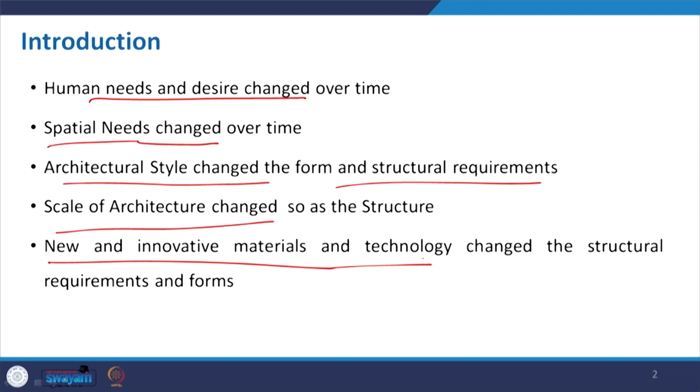And most importantly, the new and innovative materials and technologies changed everything, the scenario. From time to time we got some good material having good strength, which can be easily placed instead of using the traditional brick or other types of building materials, really giving more strength, as well as creating the desirable interior space that we normally look for, to maximize it.

So, let us move to the history, and definitely with the time constraint and other things, it is not possible to give all the examples, but here I try to summarize it or take some very prominent examples. So, I would also request that you also do this search and compile some more buildings in each of the phases, which depict the architectural style as well as the structure used in it. So, let us move on.

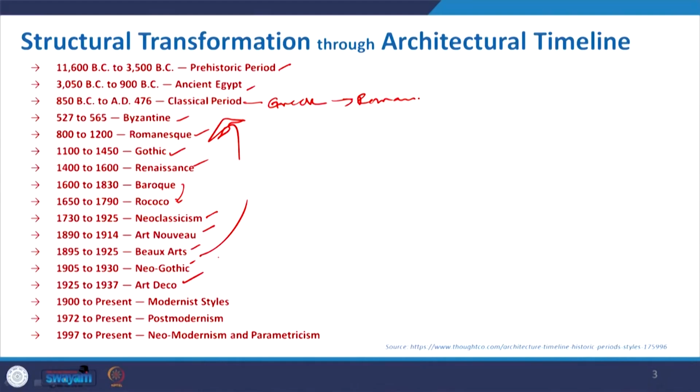And then we take the art deco and the Bauhaus movement during the 1920s, and in that particular phase the system changed; modernism started at that time. So in modern style, we go for minimalistic structure. Those are actually possible with the invention of steel and other things. So after the industrial revolution, the structural requirements and their use in buildings changed the scenario.

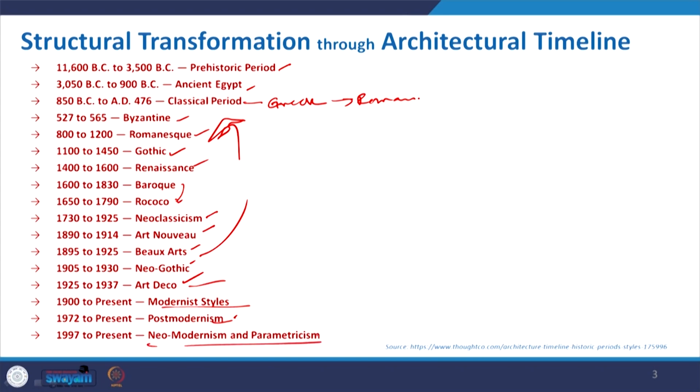Then postmodernism; we have seen some beautiful buildings at that time, including the Sydney Opera House and those kinds of structures. And then neo-modernism and parametric architecture, which are in practice nowadays, and you can see that all these, from modern to postmodern and parametric architecture, are in practice. Even in some buildings, we again look back to the earlier classical order in architecture.

But these are the architectural forms. So our focus will not only be to discuss contemporary architecture and its transition. We will also try to focus on the structural changes, how they have changed.

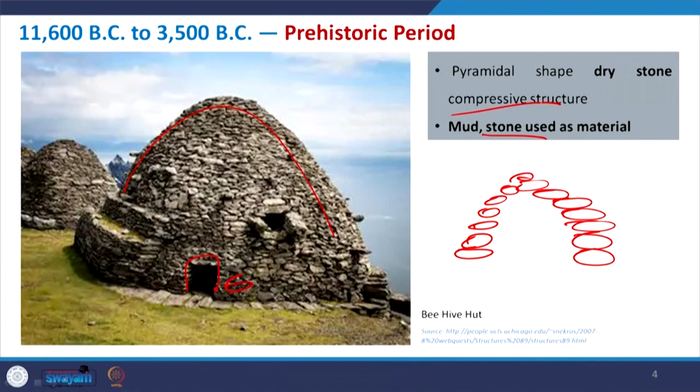And here sometimes we also used mud, but in most cases stone was used. So it had a small opening to just act as a door. So this is something really interesting at that time, and this is basically a compressive domical structure, where we just stack stone one after another to form it.

This is another example of dolmen. So this is basically the megalithic structure. A megalithic structure is basically where a horizontal slab is resting on the upstanding slab. So if you take a particular stone slab and make it upright in this position, and you put another one, again no mortar being used. So you can see how it is resting there. It is giving some form of stability, and because of the self weight and the position, it is making this structure stable.

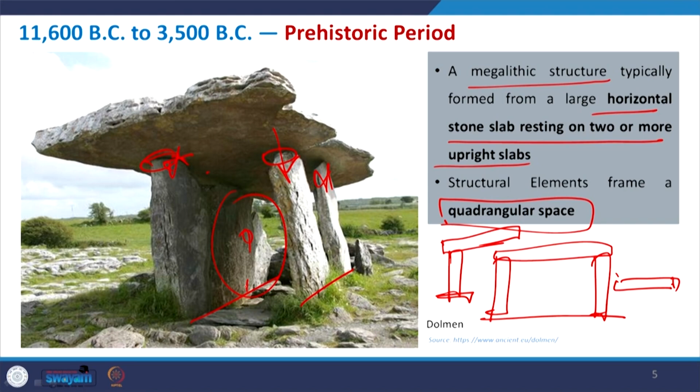So it is the horizontal stone slab resting on two or more upright slabs. So this is a megalithic structure, and it creates a quadrangular shape. So basically this is the interior space. It was helpful at that time to protect ourselves from the external externalities, or protect from other animals.

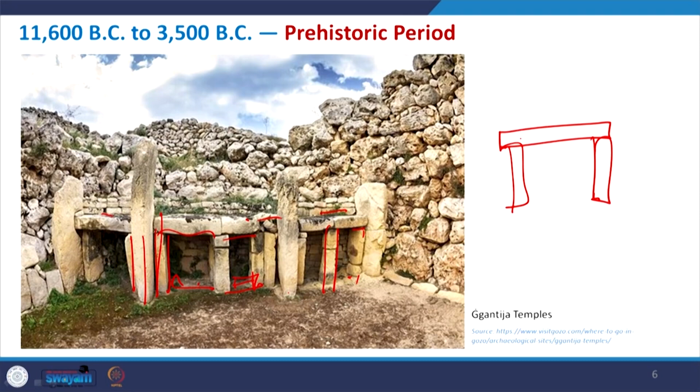So that was the idea, and from here itself the idea came of giving stability to a structure where the horizontal member will be resting on the vertical member, and later on we name it post lintel or post beam structure, that we will see in the next phase.

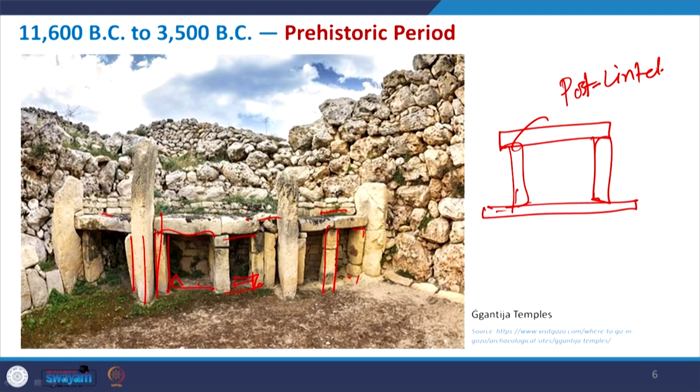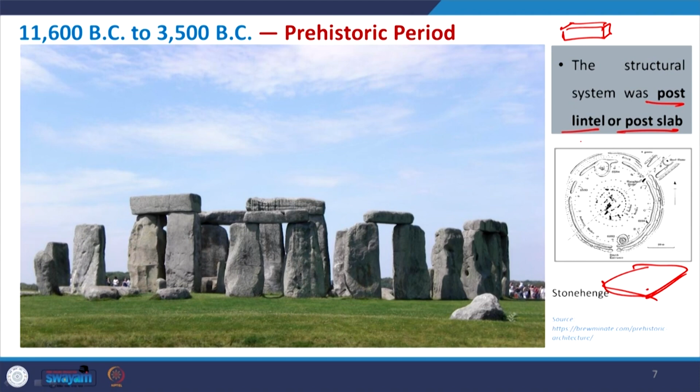So this is again a prehistoric example, and this is Stonehenge, following the same kind of arrangement of structure, post lintel or post slab. So depending on the span or the area of the stone we used, we call it slab when it has a considerable area, length and width, and when it is just like a piece of beam, then we go for this post lintel structure. So this is again one example from the prehistoric period, and now we move on to Egypt.

In Egypt again they created beautiful architecture with symmetry and stability. The pyramid is considered to be one of the most stable structures because of its larger base, and as it goes up it merges to a point. So for the wind condition and other lateral forces, this kind of shape is very useful. That is why now also in modern high rise buildings, as we go up we give a conical or pyramidal shape at the top in order to resist the lateral wind load.

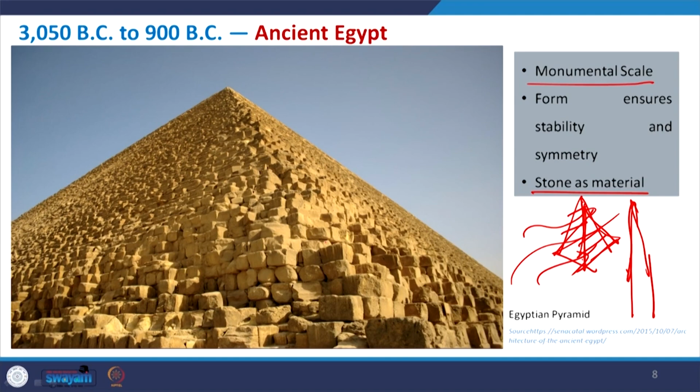But again it is a monumental scale. So structure is being used with stone as material. Using stone as a material gives good strength, and altogether, one after another, it will also give a megalithic structure, so that it was stable.

Not only pyramids, in that period in Egypt they also constructed other structures where they used the timber beam, and then this is monolithic stone masonry. So you can see this particular wall; a piece of stone they have used there. Then the columns made by single rock. So that is another important issue.

From the single rock they cut and they give some kind of ornamentation to it, they paint those structures. In Egypt they are famous for Egyptian painting on the wall and the columns. And overall the concept remains the same in this era also. This is post lintel or post slab, where your horizontal slab is resting on the vertical columns.

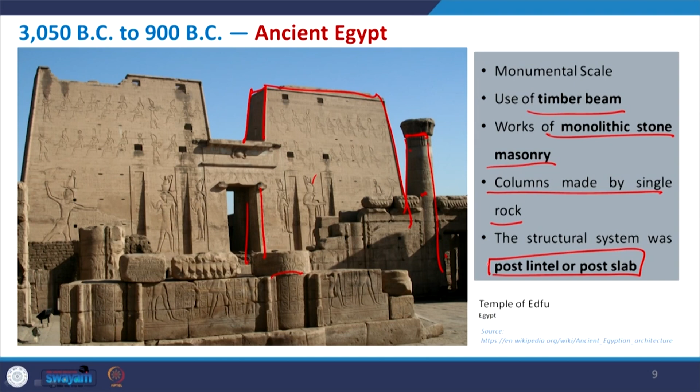Now, coming to the classical period, we start with Greek architecture, and this is the example Parthenon, which in many cases we repeat because of its multiple characteristics. As we already discussed about the Parthenon, there is basically a structural dictation to create this form. In a rectangular form multiple columns are placed and then connected with a lintel or beam, and what it gives is the trabeated system where you have this horizontal beam on the column, and then you can create these triangular members to support it to create the roof system.

And the most important thing here, it is not a simple post beam structure or very rough finish. Enough decoration has been made, and the Doric architectural style has been used in this structure. So you can see the capital of these columns, and we already discussed in the last lecture how this ornamentation was done in this particular period. Even in the lintel or beam, ornamentation has been done.

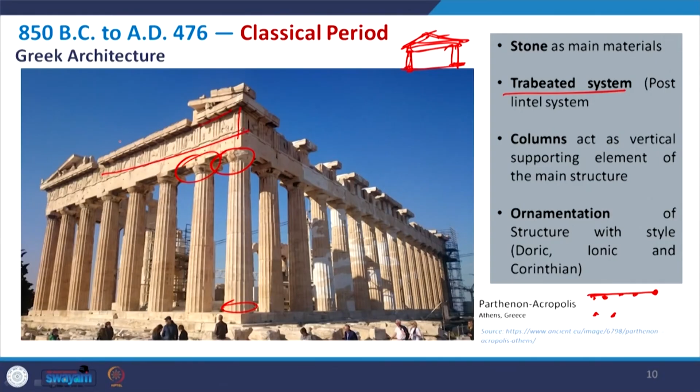So the basic idea is your post lintel structure, but with some ornamentation, and this has been carried forward to Roman architecture, where the structural system is again post slab or post lintel, but in this case the columns are arranged in circular or rectangular form.

And here in the entrance portion they have used columns, but here the Corinthian style is used, where the capital gives ornamentation aligned with organic things like leaves and other living elements. This structure is pretty similar to the Parthenon at the front portion, and the back portion is a huge dome. So, this again falls under the category where stone is used as a material.

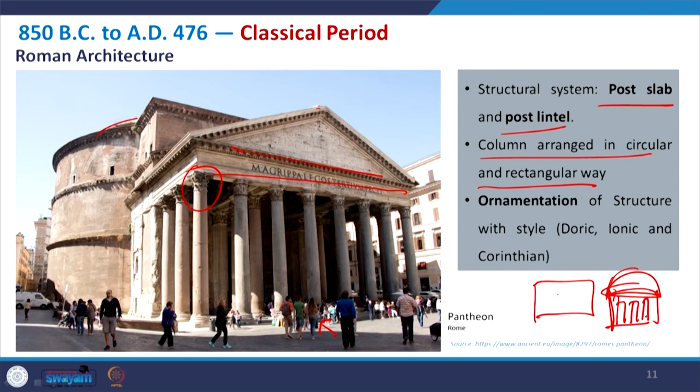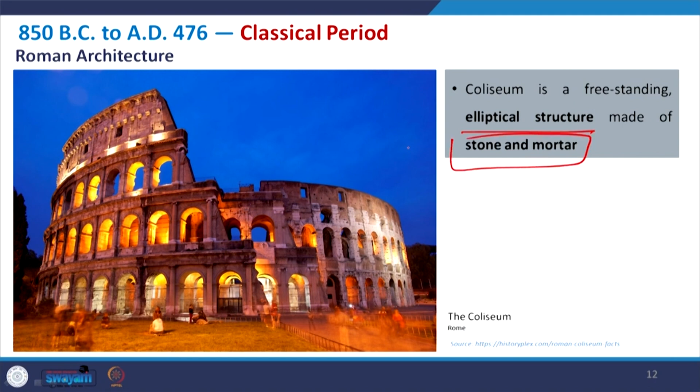Now, this is another example from Roman architecture, the Colosseum. Here this beautiful arena is made with an elliptical structure, and stone and mortar are used in this case also.

Now, come to the Byzantine, where stone is replaced with brick, and then the dome roof, like we have seen even in the Pantheon in Rome. Along with that you can see the use of arches for the windows, and even for the structure of this huge roof. So, again the pitch roof has come into the picture, and the construction material is basically limestone and sand mortar, and the construction system is wall slab. Instead of columns, it is basically a load bearing structure.

So, the wall is formed, which gives the envelope, and on top of it is either a pitch roof or a dome roof. So, there is a transformation that we can see. Earlier it was a post lintel kind of structure, where you get more void through the structural arrangement itself, but here we go for wall and slab.

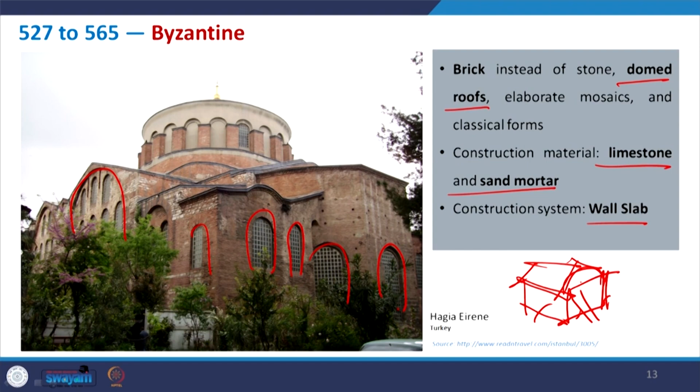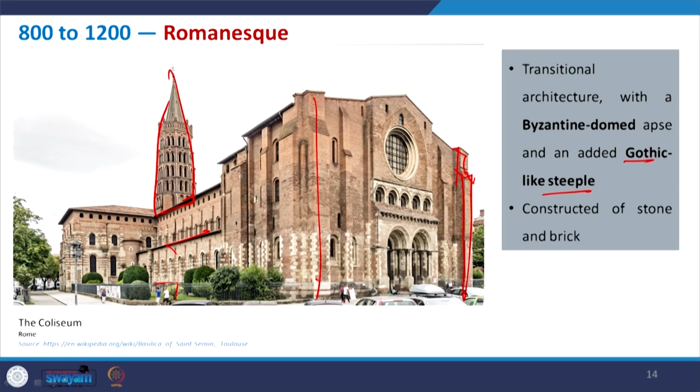Now, the Romanesque is again the addition to the Byzantine dome, that is the Gothic-like steeple. This structure is added to it, and if you see, the scale has changed a little, it has reduced here, and along with that they also create some additional support. So, basically here stone and brick are used, and again it is a load bearing structure that was constructed during this phase.

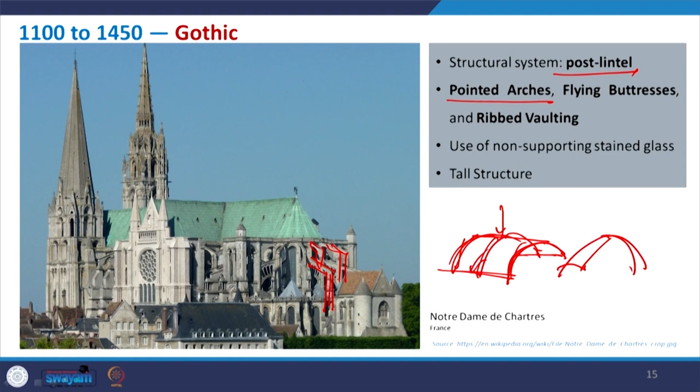And when talking about the vault, sometimes it may be a compressive structure which transfers the load through the structure onto its support, and sometimes it may be the ribbed one, where we create a frame of the vault and then cover it up.

From the interior you can see all these buildings. This is the Notre Dame in France, where we can see the pitch roof along with the buttress, and inside you get some cylindrical form and the use of vaults. So, gradually, in order to support the tall structure and also create more interior space, to make the space column free, to have the assembly in a beautiful way.

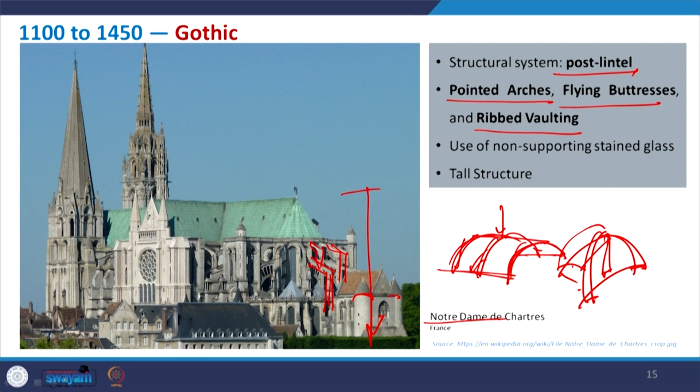So, development of this kind of compressive structure, where the ribbed vault is used and lateral resistance is provided by the flying buttress. These are some of the additions. So, shifting from simple post lintel to adding all this is one of the features of this period.

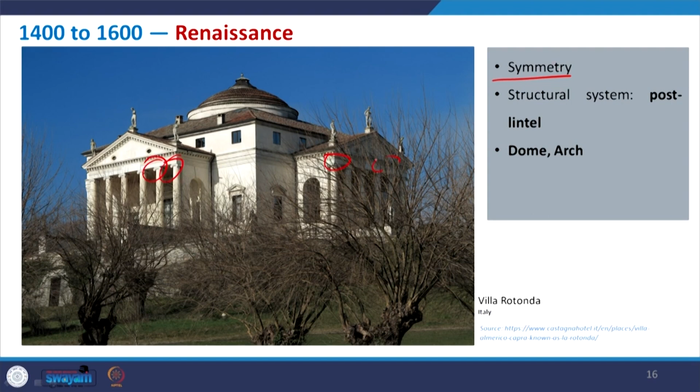Come to the Renaissance period. Here symmetry played a role, and you can see ionic columns being used, similar to the Roman, but again it is post lintel and post slab structure. Along with that, the central dome and arches are used. As we discussed with the properties of the arch, with this symmetrical arrangement it will easily transfer the load to the support. So, we can create some span with this kind of structure.

The same is true with the dome. And if you take an example from India, then the Gol Gumbaz in Bijapur also has a huge dome. So, that is practiced to create this structure.

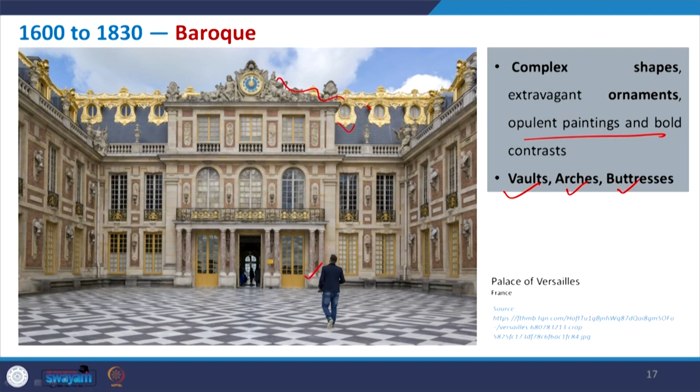Now, come to the Baroque architecture. Here basically the structural arrangement has been followed through your Gothic and all, but more ornamentation and very complex shapes, the curvatures and others made for the decoration purpose, and again vault, arches and buttress as in your Gothic architecture they have used to support the building, but more importantly it is creating some contrast with the traditional architecture. So, ornamentation of structure, creating some false column, that was used here. So, that is in this period.

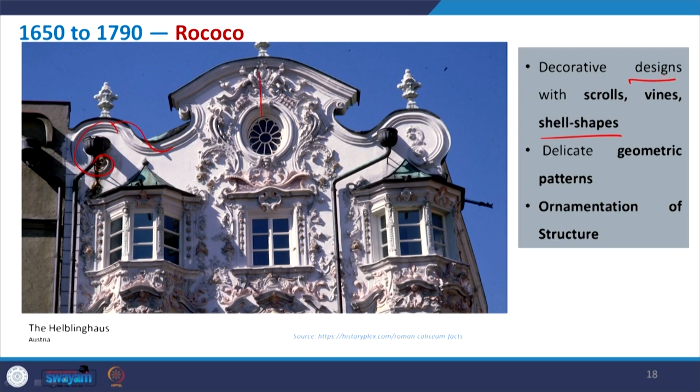Then Rococo is again further decorative design, and you can see those moldings. So, there also the delicate geometric patterns being followed, some involute and symmetry that has been made there, and basically in this case again the structure is being followed the same as the previous one, where you get this particular Baroque architecture or Renaissance architecture.

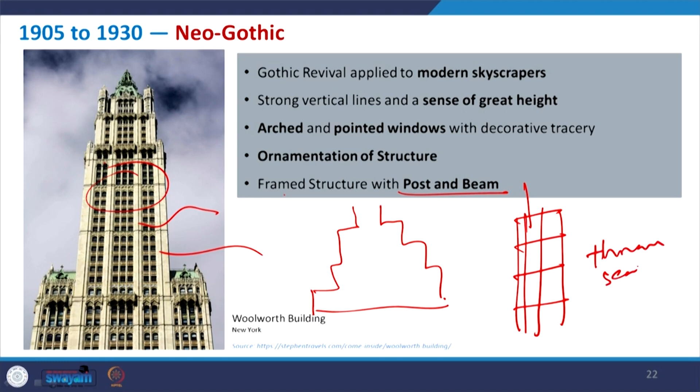Now, come to Neo Gothic, it is basically a transition to the modern skyscraper, but adding some features of the Gothic. So, Gothic again, it is a revival period where those kind of ornamentation is made, but now in this case we have this frame structure with post and beam. So, frame structure comes into point, and multiple floor high rise structures being made, but again due to that lateral pressure and all, it has this particular step cut architecture, where when you go up, the cross section of the building is reduced to resist the wind load. So, this is some advancement being made, where the scale has been reduced to the human scale. The space is optimized, but again ornamentation is still on in this particular period.

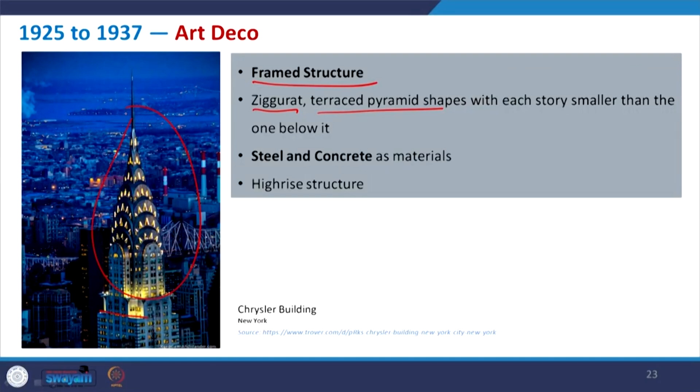Now, Art Deco movement, again the frame structure is already introduced. So, again ziggurat or terraced pyramid shape structure being made in this case, and steel and concrete used as a material to give the form, and again it is basically the high rise structure. That was the need to create some high rise office buildings or residential buildings, hotel buildings, and this is one example of that, where overall it is giving a nice aesthetic look, but from the structural point of view it has moved from a typical structure to the frame structure at this moment.

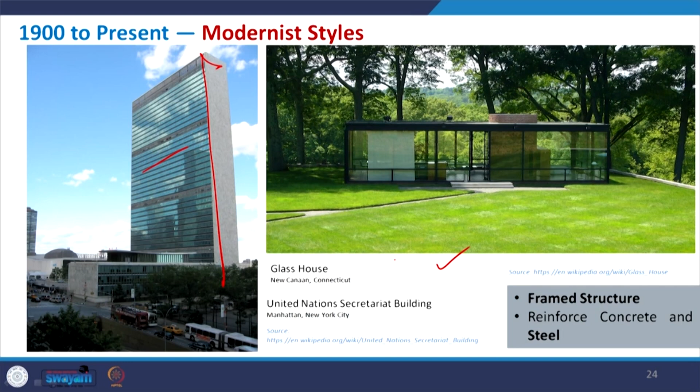Now, come to the modern style. So, here it is the time where architects and designers prefer the minimalistic form with the structural application. So, this is one example, the United Nations Secretariat buildings, very simple straightforward building, frame structure, use of steel and concrete is very predominant and very simplistic, no such decoration, and the same is true for the glass house. Again it is the use of steel and then use of glass. So, basically in the modern style decoration and ornamentation was not given prominence, rather the space creation and the use of the structure to reduce the thickness of the wall to carry the load being given importance. So, that is why since then we create multi-story buildings with this.

And in that case also, like in Sydney Opera House, it is being made on that category. Now, come to parametricism. This is the current age architecture, where it is not a perfect geometry. It is being played with some parametricism, and here you can see the nice wave and curvature being made, and it is only possible because of shell structures and other structural advancements and innovations of different materials, which can actually bring this into reality with minimal thickness and maintain the stability.

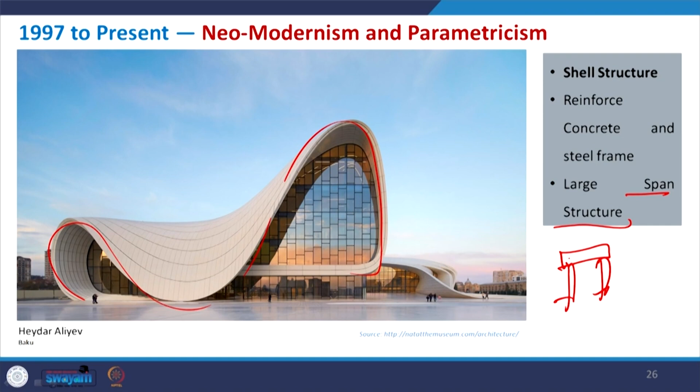So, large span structures are being made, and there are many examples. This is one of them. There are examples of different high rise buildings, many designed by Zaha Hadid. So, this is the overall transition from a simple post and beam or post and lintel structure to this kind of form. This is a long journey, and due to the invention of steel after the industrial revolution, this has become so popular. We have seen the Eiffel Tower at that time. So, that brought a change.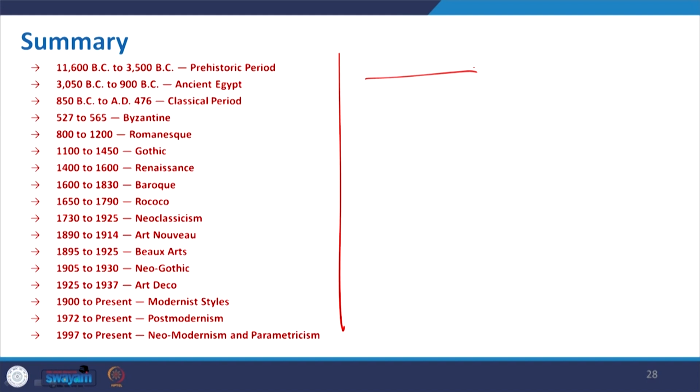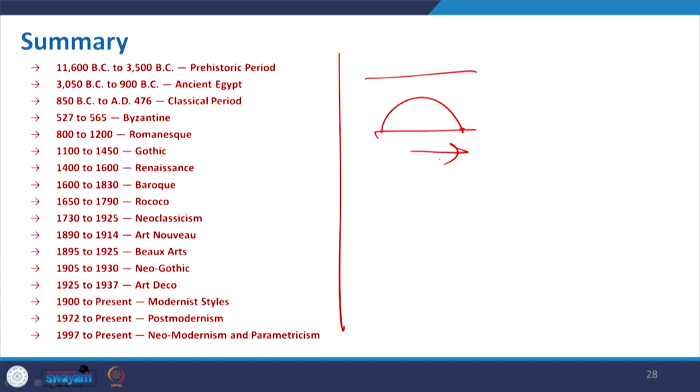During this phase, in the Indian context, we have seen the Indus Valley civilization, where there are also examples of some of these structures, like the Great Bath. Later on we move to Buddhist architecture, where we get the domical structure in Sanchi, and also rock cut architecture to create those stupas, and then we have seen the Dravidian temple in that era, where again the form of a mountain or a pyramidal form of the temple was made.

Then slowly we move to the other phase where we have seen Islamic architecture, like the Taj Mahal, which is a beautiful example of structure, symmetry and ornamentation. Even in Fatehpur Sikri, we have seen different uses of brackets and their ornamentation. Later, in the British or colonial era, we have seen the use of different columns, and they created some buildings following the old orders like Doric, Corinthian and all. And after independence we went for the global movement.

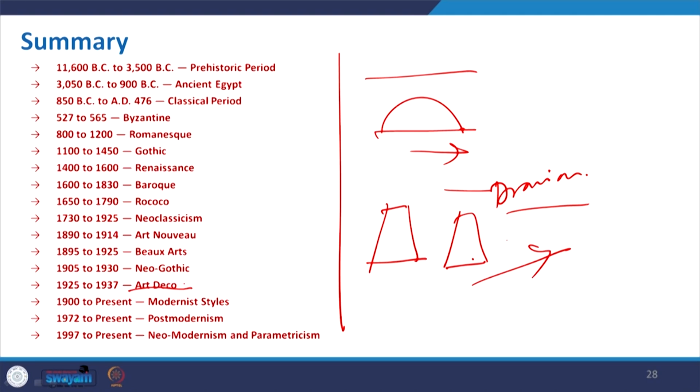So, during Art Deco and Bauhaus, different buildings were made and we followed. So, the history of Indian architecture is also very rich. We have seen the transformation from the structural point of view and the overall scale, but here we have just focused on the overall scenery of the world. We discussed some of the changes: from basic structure, then ornamentation, then in the modern era sticking to very minimalistic form, going for more space creation, and then again creating very dynamic structures, which is possible because day by day we are getting more materials that can replace the existing ones.

We are able to reduce the thickness of the wall, we can go higher and higher, and we are breaking the record of creating tall structures. That is only possible with this transition. And some buildings followed traditional classical architecture as decoration, not from a structural point of view. So, overall, architecture and structure balance each other, and with invention we keep on doing new practices, and we move from one phase to another.

So, I hope this will really help you get a look at the transformation, but I have taken very few examples and there are many. I suggest you also go through the links I have provided in each slide, so that you can get more information about those buildings and search similar kinds of buildings, which will help us understand this transformation.